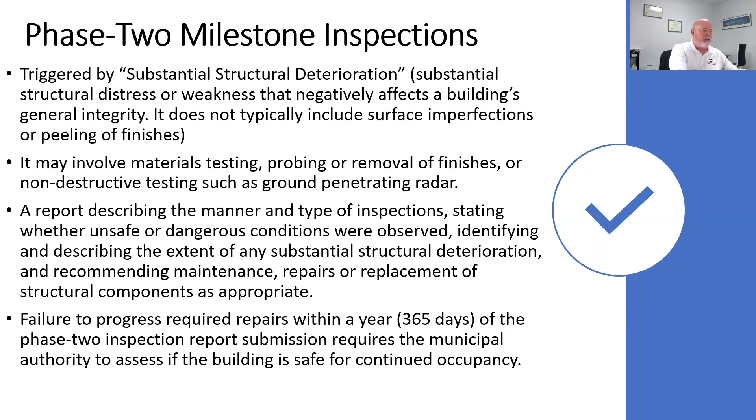We're going to want documents from the association, any of the original drawings if they're available. And again, I know for a number of buildings that were built 50, 60 years ago, those may be hard to come by. But we're definitely going to want to see any documents from repairs that have been performed in the past, any structural reports, anything that tells us what has been done with the building. And again, we're going to want to see this stuff before we go out, so that way we can plan our days, depending upon your property, and make best use of our time to make sure we're looking at what we need to look at.

And so what are we looking at? At the state level, at this point, the only thing that is needed is structural. There are a handful of municipalities down here in South Florida and West Palm Beach. You do really need to do the electrical. Boca in Palm Beach is the only one that comes to my mind. Possibly Delray. I don't have my notes, but I know for Boca you have to do the electrical as part of your structural evaluation. And then, of course, Broward and all of Miami-Dade, as part of their now 30-year program, you have to do electrical inspections.

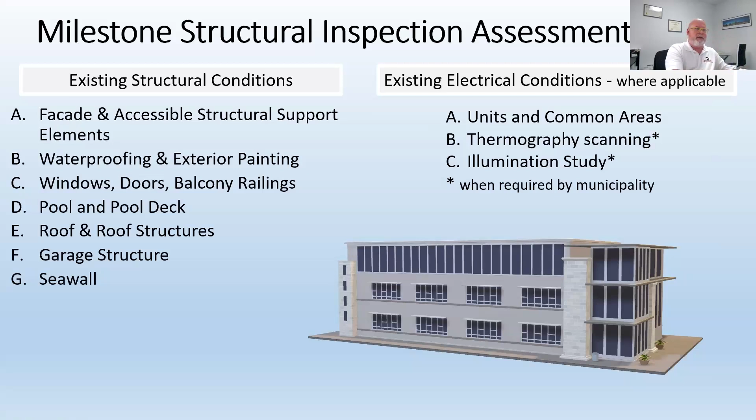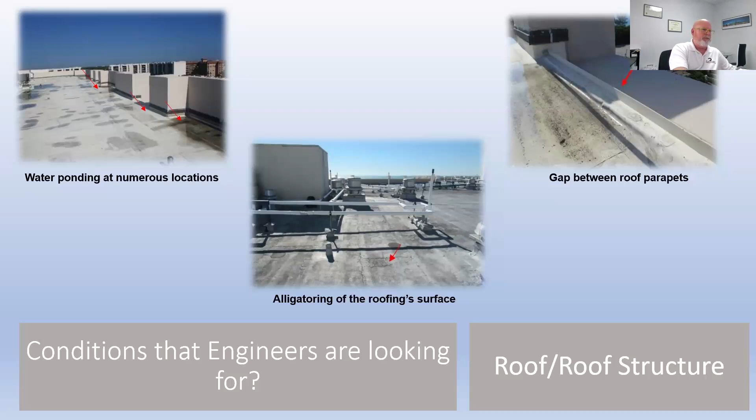Any kind of a gap on the exterior is certainly going to give you water intrusion. This is where I like to say I steal a line from my brother. My brother lives in Daytona Beach Shores, and we here in the West Palm office also do work up in that area. He's currently serving on the board, and one of the things he says is that there are three things here in the state of Florida that you need to do to make sure you maintain your property that's close to the beach, and it really applies everywhere, but especially close to the beach.

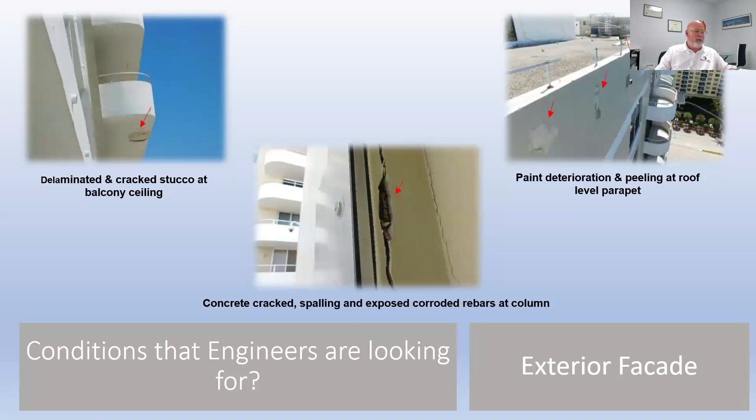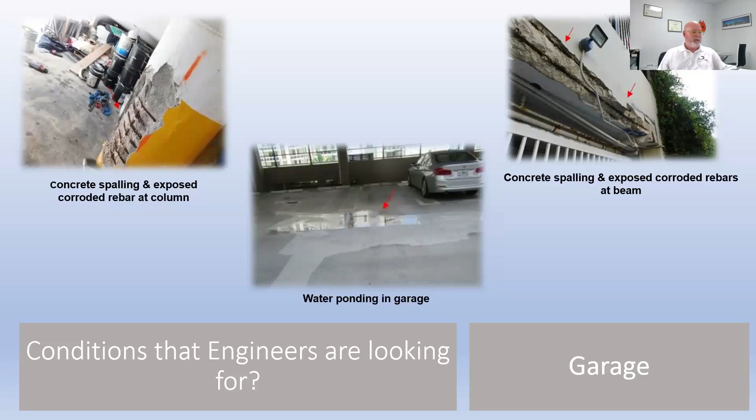Again, another good picture, we see this frequently, on the left side here, where the column has been corroded and popping out. Occasionally in parking garages like this, we also see physical damage to the columns, but that's rare. To the right, again, is another area where it has kind of gotten away. Fortunately, we don't see tons and tons of properties like this, but enough that these are points to point out.

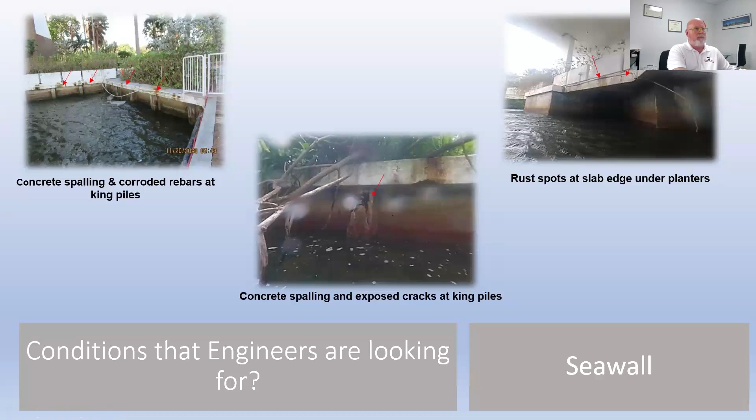We talked about the seawalls, again, just real brief on those. If this is close to the tiebacks, we're looking at whether the king piles are compromised there. Again, we're just making sure that we're not seeing these corrosion marks and things like that that indicate potential failures.

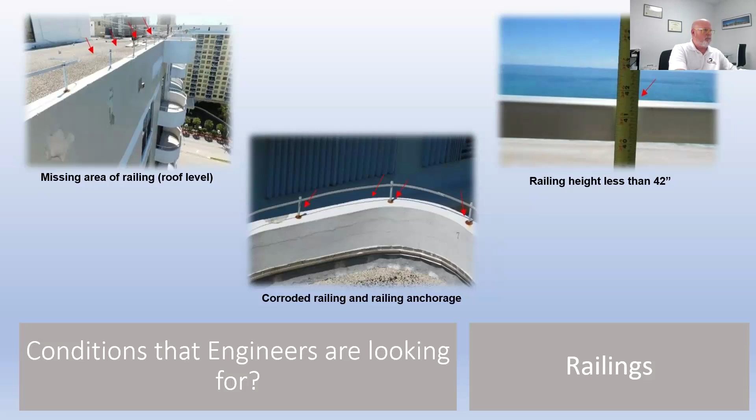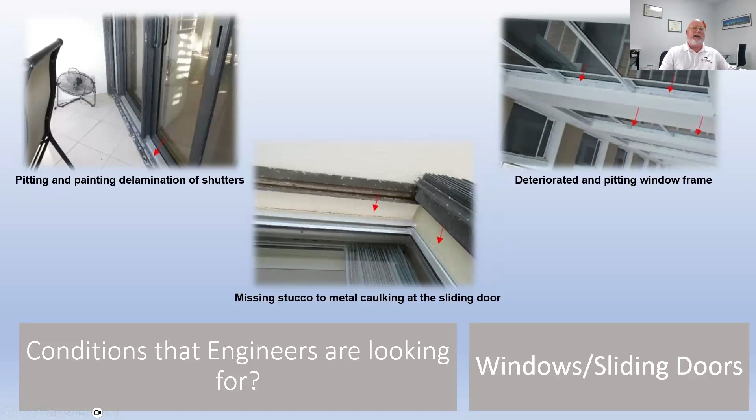Other things we're looking at on the windows, looking for, again, where we've got stucco to metal, caulking is failing. We definitely want to look and make sure that there's no stucco to metal, because that causes a lot of corrosion issues. A lot of these, as we're looking at here, are on the unit, and that gets us into a discussion that really needs to be had almost property by property as to how to handle that, even though it may potentially be the unit owner's responsibility. Because if it's not addressed, it has the potential of impacting all of the association.

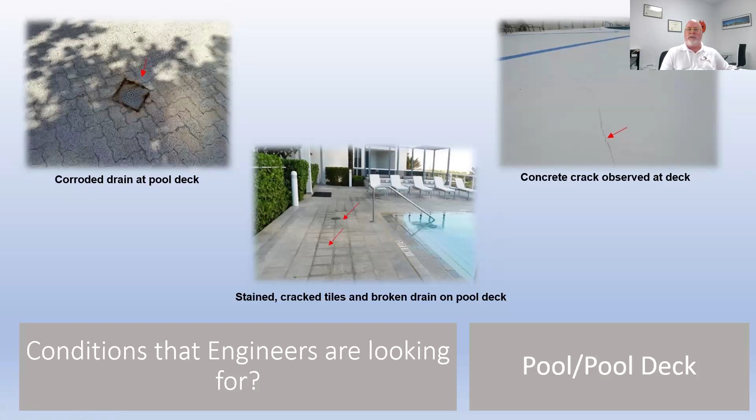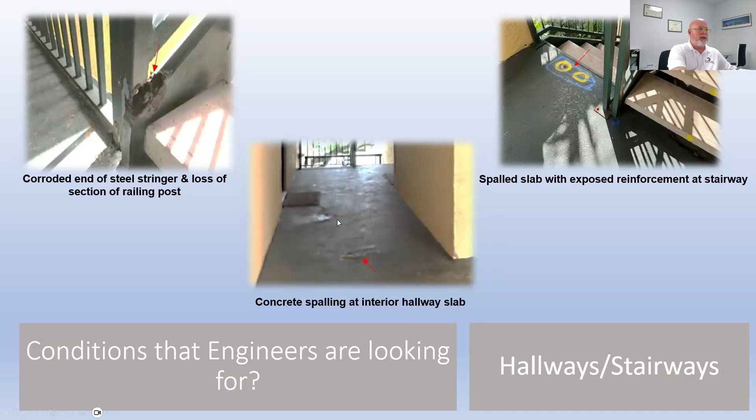Some more things that we look for. Again, pool deck that's cracking. This is especially important if we're over a parking deck versus just on ground. And minor cracks: anytime concrete cracks, that tells us that it's moving, and so we need to figure out why it is moving. Looking for, again, corrosion, water sitting in the hallways, spalling in the concrete. Those are all things that we look at to know what needs to be addressed.

So this was one of the big changes that the state made. Again, it's probably a good point to talk about Miami-Dade having this requirement around for quite some time. And when we first started this, people would raise their hand and say, "Hey, got a question. Wasn't Surfside in Miami-Dade? So why are they building a program around a program that didn't really seem to do what it should have done?" And the answer to that is the focus.

I know when Surfside collapsed, I personally had projects where we were 2 and 3 years behind in submitting the 40-year certifications, and the local authorities having jurisdiction really didn't pay any attention. They really didn't enforce it. Some did, some didn't, depending on the property and which AHJ. But it didn't have the focus that it has now.

And more importantly, the insurance companies and mortgage companies, this wasn't even on their radar. And so after the Surfside collapse, the dollars that they had to expend, as I said, now they're sitting up and taking notice. And because of that, even if the AHJs don't push it, they will. And again, either people will not sell their properties, at least not on the FHA side. They'll only have to be cash or conventional if you don't have this. And also, again, the insurance companies just will say, you're not doing what you need to do. We're not underwriting you here in the state of Florida.

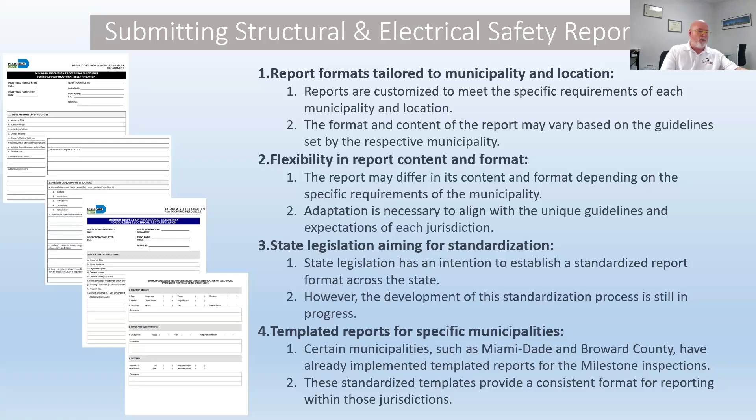And for other areas where we've done this, here in Palm Beach and Martin counties and north, we've kind of adopted the Miami-Dade Broward County forms because we suspect that the state, when they finally come out with it, they're going to be very similar. So what are some things that the association should think about?

Again, with changes compared to the 40-year inspection of Miami-Dade and Broward, there's also a bit of a transparency requirement. The association has to deliver a copy to the members or unit owners within 45 days. You have to give notices, and I'll let you read the stuff on the slide.

But one of the important things, if you're sitting here today and you haven't done the milestone or the SIRS, there is typically a cost savings associated with doing them together with the same company, because a lot of the inspections that we have to do for the two of them are very similar. And so if we do a milestone inspection, we're able to utilize the information from that to do the SIRS.

On a case-by-case basis, sometimes, we're able to look at a milestone and use that information to create a SIRS, but again, that's kind of a case-by-case basis depending upon the milestone report and what they did, how comfortable we feel, because as an engineer, we're kind of basically adopting their work. So again, if you're sitting here and haven't done either one of them, that's something to take into account.

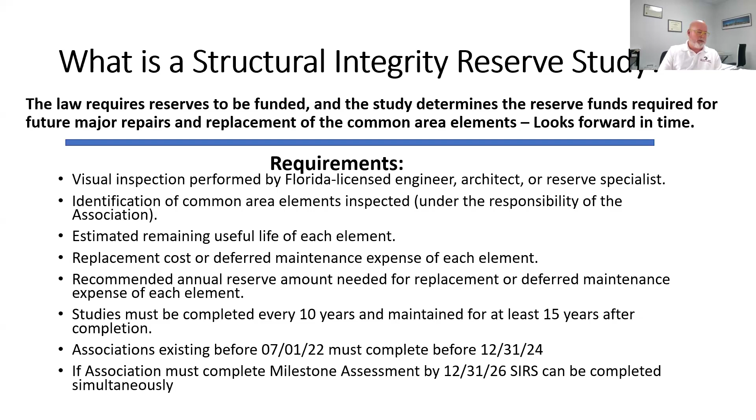So again, it's important to remember, why do we have a SIRS? It's so we have the money in the bank when it's time to do the necessary projects. So what's covered in a structural integrity reserve study? A little bit more than in a milestone. The roof and structure, fireproofing, exterior painting, waterproofing, those are all covered in a milestone, but are also covered here to make sure that you have the necessary money every 10 years to do stucco, concrete restoration, and painting to go along with that.

Waterproofing: planters are a big one out there that are a very expensive item to repair and redo the waterproofing on, so you need to make sure you have the money there. Plumbing systems, and what are we looking for there? Generally, what we put in our SIRS is the vertical stacks for sanitary risers and storm risers, making sure that those stay intact. Electrical systems are going to include your emergency generator primarily, and depending upon whether you call it fire safety or electrical, your fire alarm systems would be in there. And then the catch-all, any elements that have an impact on the structural integrity of the building.

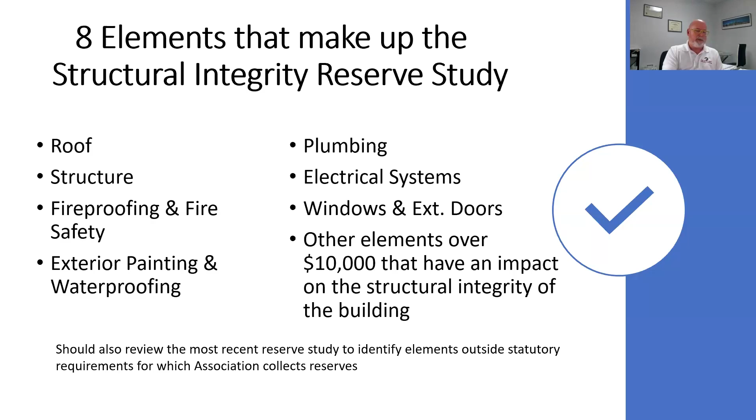We again had some folks where the boards want to consider the SIRS as a life safety issue. So if there's a safety concern, and that's the point of this SIRS, making sure all the safety equipment is there. So we have created SIRS that have replacement money for the stairwell pressurization fans, as part of the fire system. This is just one example. So again, a lot of it is very specific to your particular property. It's a little bit of requirements.